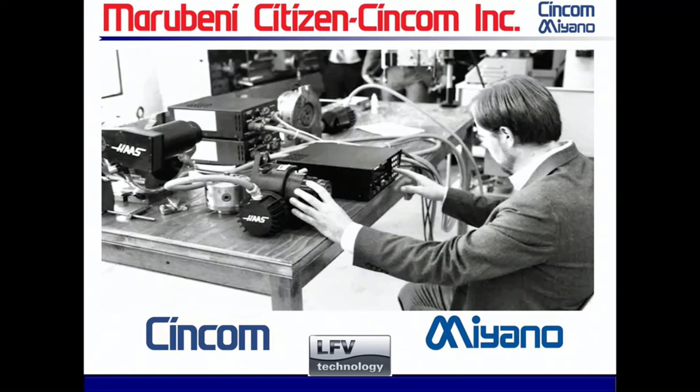Allendale Machinery is a third-generation company. We were started in 1981 by my grandfather. Prior to that, he had worked with many different machine builders and distributors throughout the country from the early 50s. After serving in World War II, he went to Georgetown on the GI Bill and then started working in the 50s and brought in a lot of the machines you see today. We now have our third generation. My father and my uncle, Marty and Andy, are the ones running the company and pushing it forward even farther.

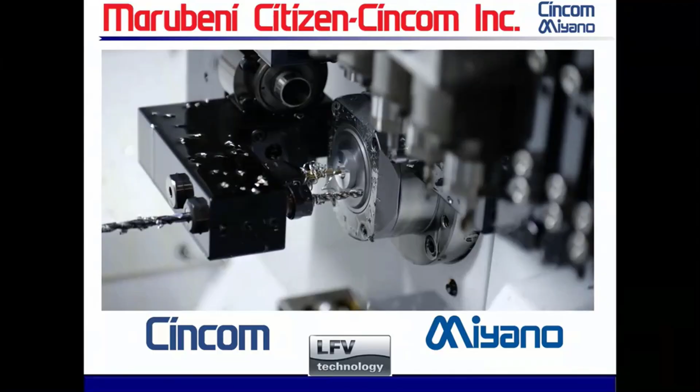With that, we've slowly grown and taken on many different lines and products. We've gone from just being a machine tool distributor to being a full service company, offering our customers tooling, service, applications, training, and really just helping them find the manufacturing solutions they need to grow. Allendale as a company is looking to help our customers compete globally in the manufacturing market space. We're really trying to be the ones that support manufacturing in the United States. We're doing this by offering our customers manufacturing solutions that are going to allow them to be efficient and be competitive in that global market.

Helping customers pick the right equipment, helping them maximize that equipment by giving them proper training, by having our engineers work with their people to optimize any programs or any tooling they're working with. And then in the end, keep the solutions up and running with service, being there ready with parts and the expertise needed to keep them making parts, making sure that all is up to the standards that we've set for ourselves. Our hope is that when they work with Allendale, they come to realize that we can offer some great solutions for them, and from there move forward and work with them on other projects.

This machine is a Citizen-Cincom L20, primarily used to make long and slender components, mill-turn, but you can also do short components as well. Really thrives in a production type environment, high volume, short cycle time, multiple shifts a day, holding tight tolerances. This machine is typically seen in the medical field, aerospace, defense, a little bit of industrial as well. Really covers a broad span, more geared towards high volume environments where part tolerances are critical.

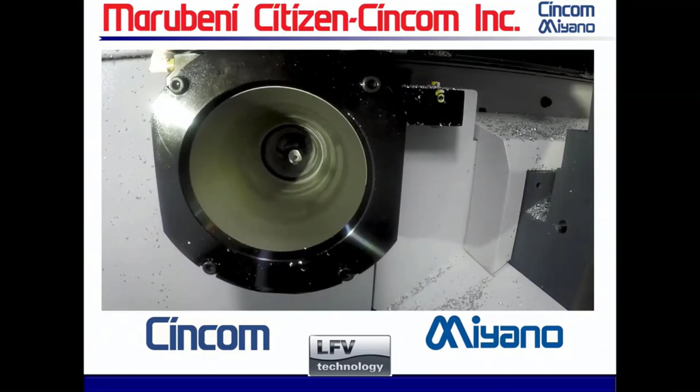So the part that I'm running right now is a bone screw, heavy medical application. It's a long and slender part. We're running it in aluminum for this demonstration so we can run with the coolant off so you can really see what's going on. Once you turn that flood coolant on, it just becomes a monsoon in there. You really can't see anything moving around.

Typically, bone screws come in a variety of materials ranging from titanium to cobalt chrome. All of those materials really need the coolant on. So for this demo, we were doing aluminum. Key features on this particular setup, the primary one is the thread whirler. It allows us to cut long thread in one pass.

This is important for a Swiss type machine because you shouldn't be drawing back into the guide bushing. You can only cut roughly 3/4 of an inch at a time. The thread whirler allows you to cut up to the maximum stroke of the machine in one pass. Multiple inserts spread out the load over the course of the threading operation.

Another accessory in this machine will be our spindle speeder. It amplifies the speed of the machine. In this case, I'm running 6,000 RPM on the machine motor, but the spindle is outputting 24,000 RPM at the tool. On the main spindle side, we're using turning, milling, and thread whirling. On the sub-spindle side, we're using turning and milling as well, but the milling being the spindle speeder, so we're actually achieving a very high spindle RPM.

We also have a part ejector that allows us to spit the part out at the end of the cycle and repeat to the next one without stopping. To optimize the process in this particular application, I was able to speed up some of the backside work. Reason that's really beneficial on this machine is you're working both sides at the same time. So any second that it's idling on the backside is just free time that you can gain. So I was able to bring more work to the backside to balance the cycle time out and actually decrease it as a whole, part to part.

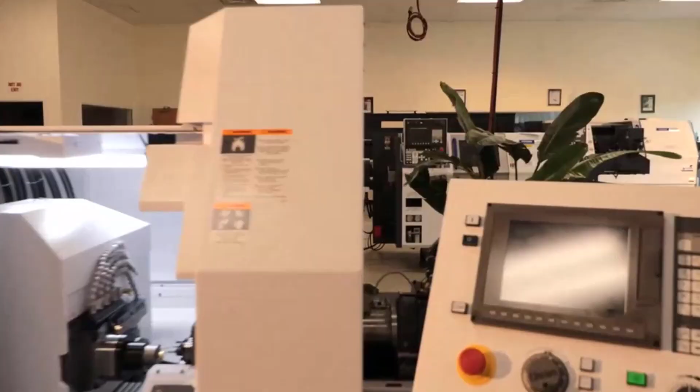We'll start off, we'll just have a look behind the control at the main spindle. On the main spindle side, we have the spindle. The spindle has a Z-axis. The Z-axis will move back and forth, control lengths on the part. The stroke on this L20 machine is approximately 200mm. So we've 200mm of travel. If we want to machine longer than that, we'd basically do a rechuck. We'd grab with the sub spindle, then grab more material.

The main spindle itself is a 10,000 RPM spindle. That spindle has a full C-axis. Also, the main spindle is actually oil cooled. So with the aid of the oil chiller, the oil cooler, it's very stable as far as machining with that spindle. Obviously, any movement on an axis creates heat. This minimizes any heat that's affecting the machining area.

We can also convert this machine from a guide bushing machine to a non-guide bushing machine. Attached to the main spindle, we can see a belt. To change over to non-guide bushing, we basically detach the belt, swing the belt to the side. The belt is actually driving a shaft that's driving the guide bushing. So we remove the belt, then we will remove the guide bushing housing itself, and we'll replace the spindle cap nut with a different cap nut to allow us to extend the spindle to move forward, basically through the area where the guide bushing is at this point in time.

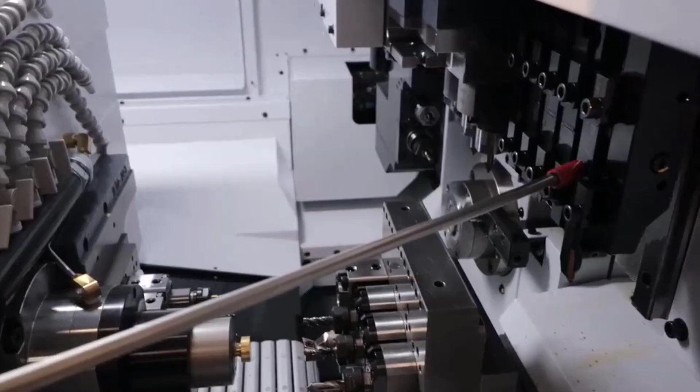Now we'll move across to the main cutting area on the machine. In the main cutting area, above the guide bushing, we have a gang plate with an X and a Y axis. On the right side of that gang plate, we have 5 turning positions. First position is 5/8. The other 4 are 1/2 inch for 1/2 inch shank tools. Also located where you can see this cutoff tool is a small stylus. That stylus basically is a cutoff breakage detector that is standard with the machine.

Just to the left of those gang tools, we have 2 live spindles in the cross location. These spindles are 9,000 RPM spindles. If needed, we can remove these spindles and put speeder units up to 4 times in those positions.

We'll move further over, we can see this set of tools. There's 2 tools there. That is actually a B-axis. The rotation on that B-axis is 0 to 96 degrees. So 0 basically would be if we were using a live tool on the face of the part. We can swing it from that location to any location and machine with the B-axis around through 96 degrees.

On the particular holder you see on the B-axis, the top position is basically a built-in spindle. The lower position accepts tools from the ATC. The ATC is actually the 12-station carousel you can see at the far side of the machine. The RPMs on the B-axis are 12,000 RPM. The tool change time for the tool in the lower position to exchange a tool with the ATC is approximately 4 seconds.

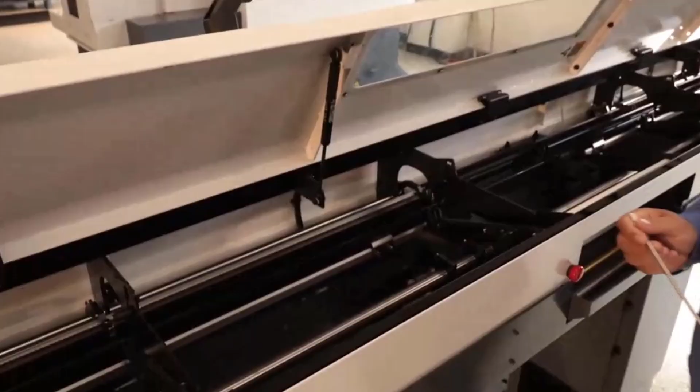The carb bar loader was specifically designed for our Cincom line of machines. Once the bar loader is attached to the machine tool, it is fully controlled from the control on the machine. Not only that, the pusher on the bar feed becomes an axis on the machine, an A7 axis. So basically that A7 axis, as the part is being machined, will follow the motion of the Z1 axis on the main spindle.

So inside this bar feed, we have a rail. This rail on this machine is approximately 12 feet long. We can put up to 12 20mm diameter bars in this rail system. So when a bar is loaded, basically it lifts the pusher out of the way. A lot of bar feed systems have 12 foot for the bar, then they have an additional 3 or 4 foot for the pusher. On this machine, when it loads a bar, it swings the pusher out of the way. So we don't have a bar feed that's 12 foot plus 3 or 4 foot. It's very compact in design.

So the pusher swings out of the way, the bar falls into the channel, the pusher comes back down, the gripper grips the bar, we push the collet on the back of the bar. So the material is supported by the channel set. The carb machine comes with 2 channels as standard. So you buy the carb, 2 channels are standard. We do have different sizes. If you want extremely small stock, you might go with a different channel size. So the bar is supported by the channel set.

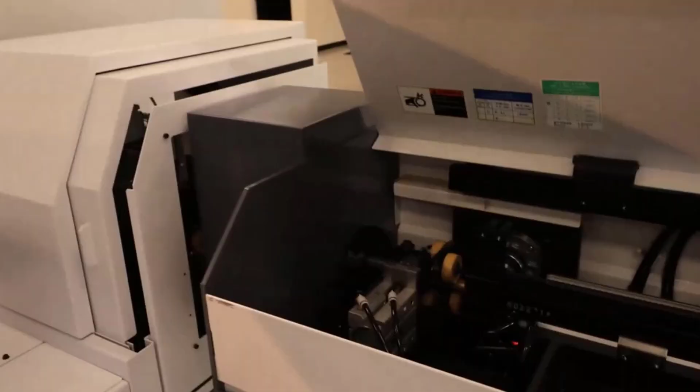In addition, there's oil that's pumped into the channel as the bar spins. The oil clings onto the bar stock and creates a hydrostatic effect that further stabilizes the bar and dampens vibration. In addition to the channel set and the oil dampening the bar, if we move down on the inside of the bar feed, on the front end, we have a set of rollers. So additionally, the bar is supported by the rollers inside the bar feed. As the pusher moves forward and the bar stock gets shorter, once it comes to the pusher, these grippers will open and allow the pusher to pass through.

Additionally, on the back of the main spindle, I just opened the cover, we have a further set of rollers on the back of the spindle. Like I said, the bar feed is fully integrated with the machine. So when we open the collet to grab more bar stock, the machine actually opens these rollers also. So you're not dragging the rollers across the bar stock.

So now I'd like to hand you over to my colleague Ray Navarro, who will go over a part being machined.

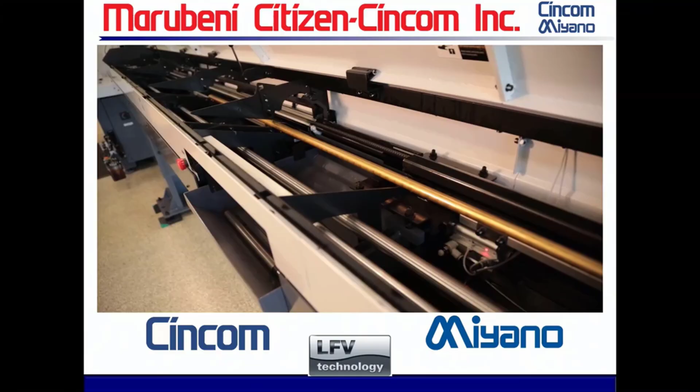Now we notice it's time for bar change. The machine has received the end of the bar signal, and the carb will execute a series of operations and load a new bar. The carb is fully controlled and synchronized with our M70 control. The carb is the best way to go on our Cincom lathes.

With this, we have concluded the ATC demo part.

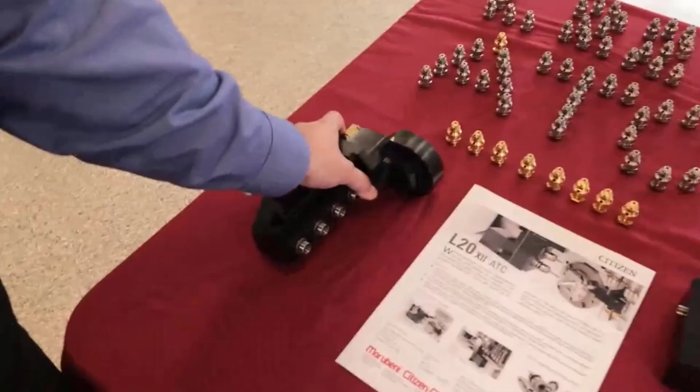So the ATC machine is really a state-of-the-art machine. It's really a standard type 12. This is the holder you can see for the standard type 12 machine. If we get the option for the ATC, this will be the holders, right? MEU 110. These are the holders that we call BT15 that go into station 12.

These are our parts I want to show. So it's a unique machine for very complex parts that we can get done. Talking about the footprint, this machine, like I say, is standard to the type 12. The only thing I will point out is it has 472 millimeters in the back side of the machine that holds the whole mechanisms of the carousel and the slide.

So now I want to talk a little bit about M70 control. M70 control is a unique system that realizes fast and smooth operations. It displays easily understood illustrations, equipped with high-speed NC, on-machine check function, code list display, and much more.

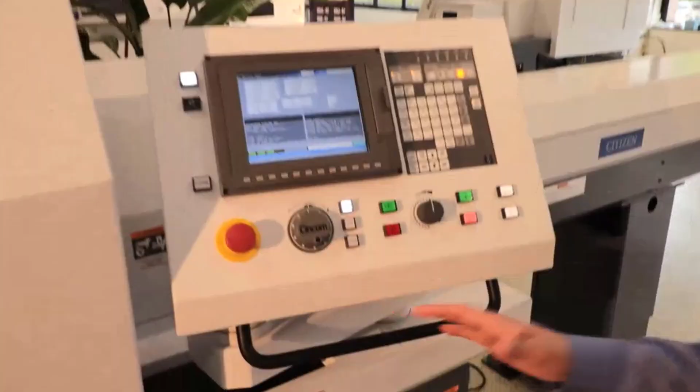So now I'm going to start going through MC data. MC data, or machining data, is utilized by the machine to gain information for the current job that is running. Into the MC data, you can set bar stock. As you can see, it's highlighted in yellow. Tool position point, cutoff tool number, cutoff speed, cutoff feed, cutoff end diameter, and there's some others. Like this one, you can also swap guide bushing less.

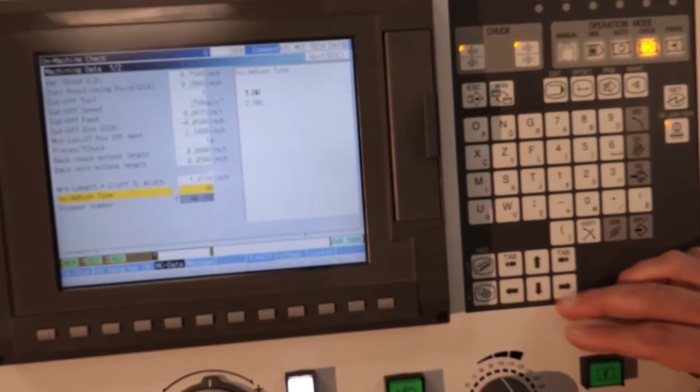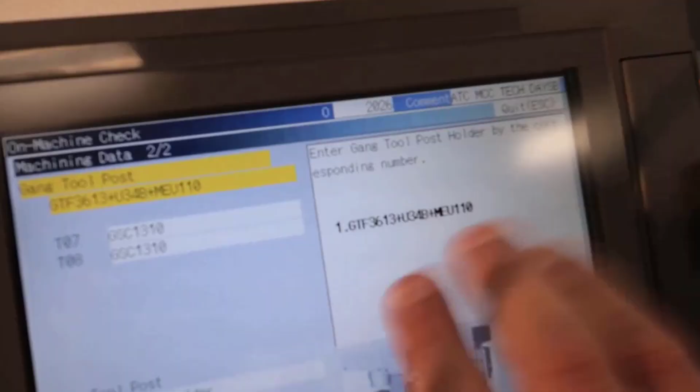Second page of MC data, this is how the machine recognizes which holders are being used for the job that you want to run. So as you can see in the MC data, right now you see MEU 110. This is so user friendly. So you can see here, every holder is identified with the number that we call MEU 110 in this case. All the rest of the holders have their own name.

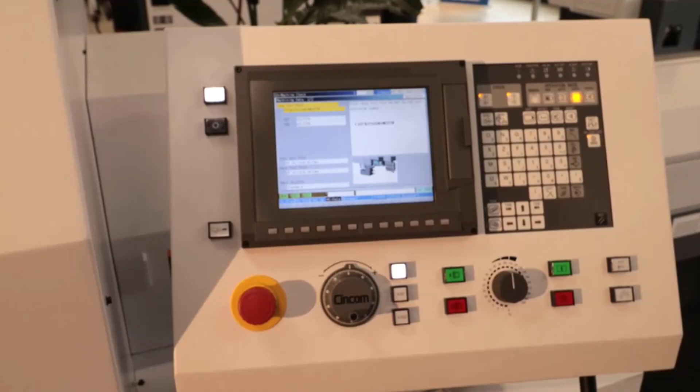So now I want to show, you can see inside the machine. Right now, this is not how we start running anything, right? But I want to show the A5, which is the axis that comes forward and retracts. A6 is the rotational axis that holds all our tools on the carousel.

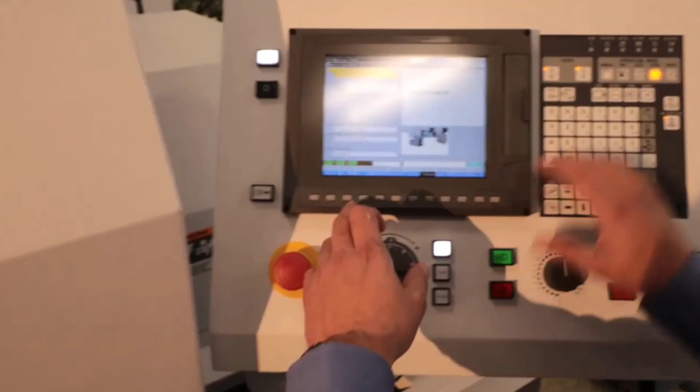And this machine and the beauty of Citizen, they have been developed specifically for ATC. They have a specific HMI screen, which I'm going to show you right now. ATC. So this is the screen that we mainly use for setting up tools. You can manipulate anything from here regarding the ATC, such as tool change, tool store, take the tool, index the magazine, shutter open, shutter close, air blow, magazine retract, and back spindle retract.

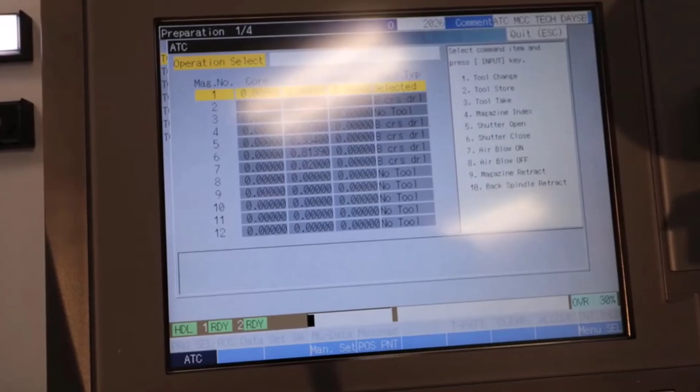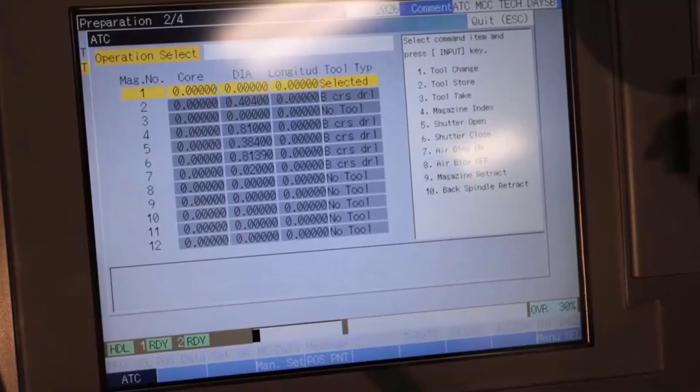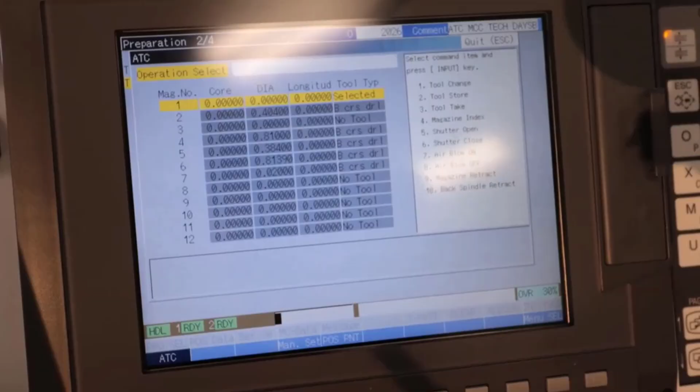So in this page, if you have the pocket empty, you will place the holder with your tool, and then as soon as you set tool 12, like we normally do — people that know Cincoms know, but for those who don't — you will use that diameter, then touch off your bar stock. Then if you had, let's say, number one highlighted in yellow, you will store that tool, and the magazine is so smart that it always remembers where the tool is located.

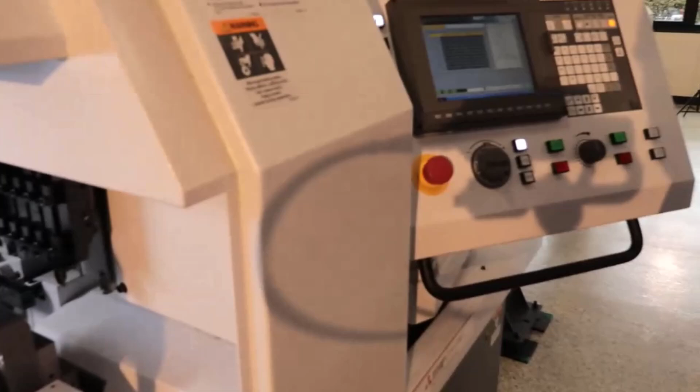So I'm gonna try to show right now. If you see in the machine, we have the A5 kind of toward the front. So from this page, I'm gonna say magazine retract. Magazine will go all the way to the back, zero position. I want to close my shutter, so 6, close. Now I'm gonna do a position point. I want to show one of our greatest fixtures. Cut off. I'm gonna cut off.

This is a great machine.

So right now, I'm gonna show the handle and check function. I'm gonna track this. So if you see here, now I just hit cycle start. I have my machine. I'm gonna hand wheel. The great advantage of hand wheel: you can move forward through your program, and if you decide to stop, it will stop. Also realize that in the check mode, you can stop your machine, do any edit you desire on the fly, and go back and keep going.

This is how Citizen... All right. As you see, the machine is moving. I'm going to show this. Start my facing. So let's say right there, I want to stop my machine, so I can just hit one block. After that, I can say correct. Oops, I'm going too fast. So as you see, now it allows me to make any edit if I want, then continue. So the only thing you have to do is just hit operate, and then you can keep going.

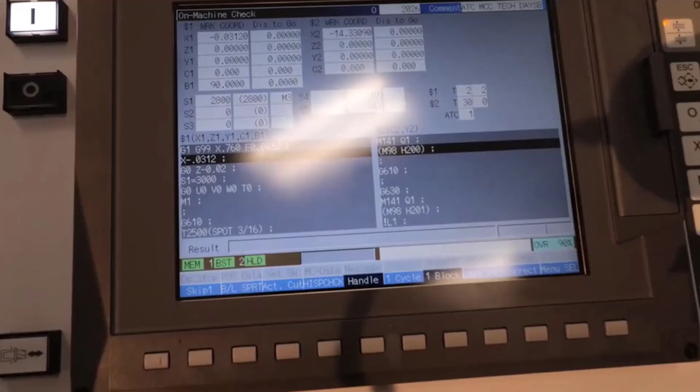So let's keep going. So I'm gonna stop right there. Now I'm gonna reset the machine. This is just showing one of, to me, the greatest features; when you're setting up the machine, this will be awesome. I'm gonna restart. So now, going back to the ATC page, I want to show you how you can perform a manual tool change.

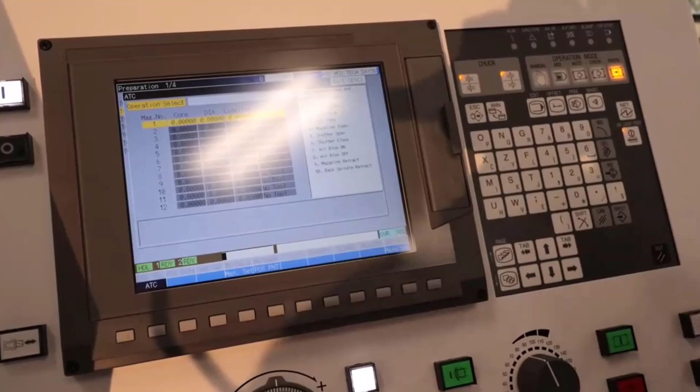So, ATC. Right now, as you see here, we got tool number 1 selected. So let's say I want to store that tool. You see here, we got 10 options. Number 2 will be tool store. So the only thing I have to press is input and cycle start. I would usually recommend bringing the stock inside the guide bushing just for safety. So I will do that right now. Okay, so I'm good to go.

ATC, I hit tool 2, store. Going slow with feed hold slow, just so everybody can see, placing the tool on station 1, going out. Now I have tool 1 holder empty. Let's say now I want to grab tool 6. If you can see here, the only thing I have to do is just highlight station 6 and say tool take, input, cycle start, inside.

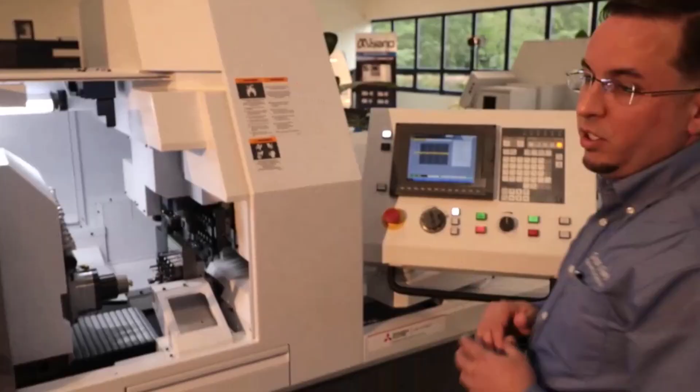It's going to tool 6. You see the magazine index to 6. Grab the tool, going out, and done. So I just want to show this. Probably people will be wondering about how we set the tools. It's really simple to set tools here and run this machine. Use the same code as a standard machine.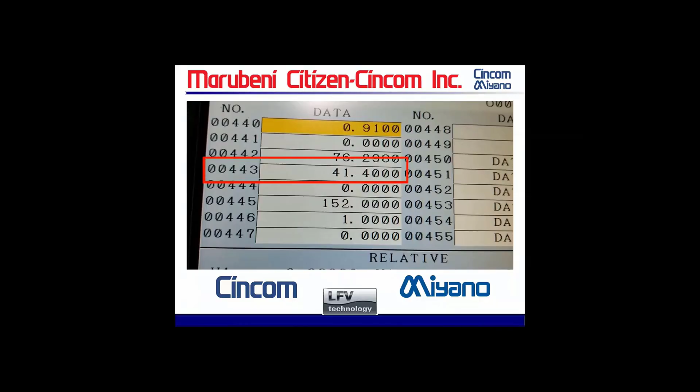And here's an example of almost real-time info sent from the bar loader to the machine. As I move the pusher by hand, see custom macro 443. Now with this type of information being sent through the program, if the operator or the setup person forgets to send the bar loader info, the information will be sent by program. We are also working on having this information of parts remaining and pusher positioning showing up on our operator screen.

Another new feature that we'd like to add to our bar loaders is last bar sensor. So if the lid is closed and the machine is in automatic and the last bar is loaded into the channel, now with the lid still being closed, we have a warning light blinking that states that there are no more bars left in the bar loader.

Please be on the lookout for this option and Ethernet connection between the C320 and the A320 in the near future. Thank you for your time, and please continue on watching the MCC Tech Days.

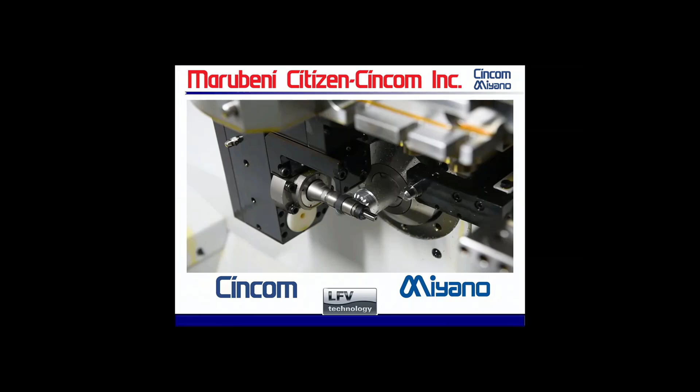Thank you for joining us today. I hope you got a small glimpse into what the Citizen-Cincom Swiss CNC machines are capable of.

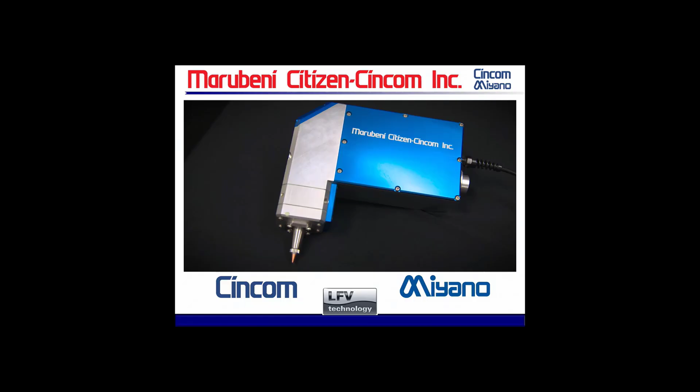The L2000 utilizes the IPG Photonics fiber laser systems. IPG is the world leader in providing fiber optic lasers and is fully supported in the US. Multiple power units are available that address specific application requirements. One option is a QCW, quasi-continuous wave 300-watt system that can provide power bursts to 3 kilowatts for extra power when needed. The laser head assembly mounts on the gang tool slide of the Cincom machine.

The movements are programmed in the part program of the machine control. The unit has the unique capability of also mounting on the B-axis tool position, allowing for laser cutting at various angles for components that require angular laser cut features. The laser head assembly is liquid tight, so it's capable of operating while high-pressure coolant is flooding the workpiece during the machining process. Internal air pressure protects the lens and internal components.

High-pressure coolant that is used during the cutting process also feeds coolant through the tubing material in the auto-loading bar feed system. This provides a flushing of dross or chips that are created during the laser cutting process. An integrated custom-designed CCD camera for optical viewing and alignment is included for XY beam alignment to the nozzle. The live camera view is visible on the included touch monitor. This greatly reduces setup time.

The L2000 is completely interfaced to the Cincom control. Cutting path, offsets, laser cutting parameters, laser focal point, and gas pressure are fully controlled and edited in the machine control. One of the unique features of the L2000 is that it's a modular system and not designed for a specific model Cincom or Miyano machine. The system can also be retrofitted to some older model Cincom machines.

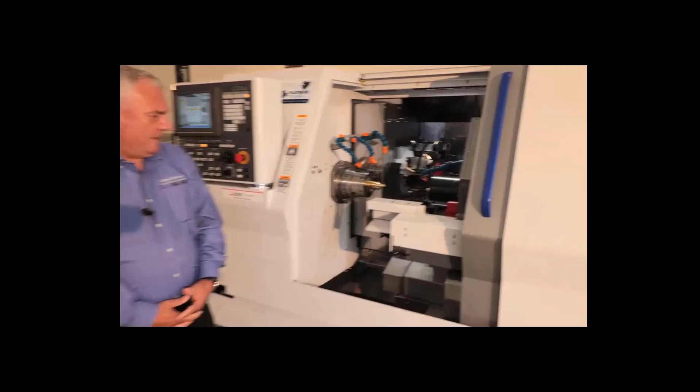Hello, my name is Tim Duffy, and welcome to the review of the Miyano BNX 51 MSY machine. The BNX 51 MSY machine is a twin spindle single turret machine. The machine has a total of 7 cutting axes. What makes this machine unique is the subspindle has not only a Z-axis, it has an X-axis that allows us to have a lot of flexibility in machining the front work and the back work simultaneously. We'll see that later on when I run the test part.

The machine is constructed on a one-piece casting. That casting is a platform design. That platform design helps us maintain flat surfaces and reduce distortion. So it's a very stable and extremely rigid setup for the foundation of the machine. Slides on this machine are box ways and hand scraped. On the left side, we have the main spindle. The main spindle is a 5,000 RPM spindle and 20 horsepower.

That spindle is supported by 3 sets of bearings at the front. The 3 sets of bearings comprise 2 sets of cylindrical roller bearings and 1 set of angular contact ball bearings. The roller bearings absorb lateral loads, whereas the angular ball bearing accepts axial loads. At the rear of the spindle, we have 2 bearings that are cylindrical roller bearing design. So having the 2 on the back really stabilizes the spindle.

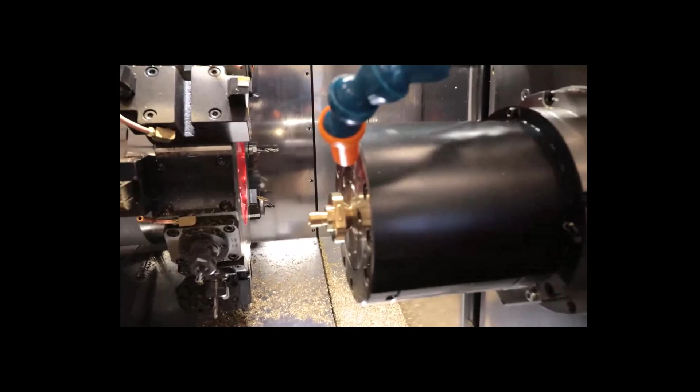Located on the right side of the machine, we have the sub spindle. The sub spindle is a 10,000 RPM spindle. Sorry, 5,000 RPM spindle, 10 horsepower. The spindle bearing layout is the same as the main end, the 5 sets of bearings. The nose on the sub spindle is 110 millimeters flat. And it's also standard with a Hardinge S22 pad system. That sub spindle also incorporates a C-axis along with a brake, just like the main spindle.

As I mentioned earlier, the sub spindle has a Z-axis and an X-axis, the X2 axis. So having that X2 allows us to machine the part on the main spindle utilizing the X1 and Z1 of the turret. On the back end, you can see a double turning block. So independent of that, on the back end, we can be utilizing the X2 and Z2 and machining a totally different part profile on the sub spindle.

Above the spindle, we have another coolant line for cooling the part on the subspindle side. We've also got an air port on the subspindle side. Within the subspindle, we have a pneumatic ejection unit. With that ejection unit, we can program an air blast to clean chips out of the collet. We can program the medium pressure coolant system to flush chips out of the collet.

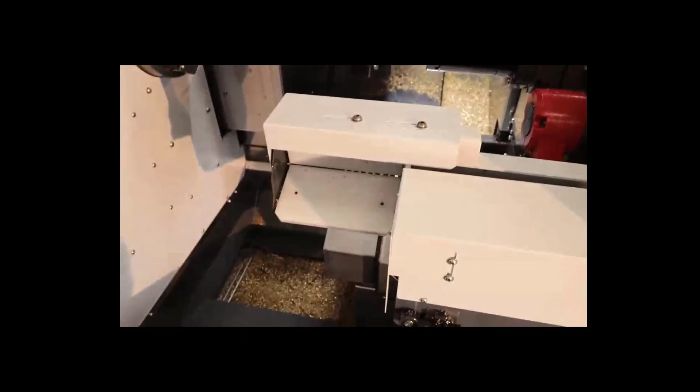So the part is ejected into the parts catcher that's attached to the subspindle. It would swing up, catch the part, and the ejection unit will move forward and knock the part out. That parts catcher can come forward and catch a part off the main spindle if there's no desire to do any back work; we can just machine on the front and cut off. If you have a short bar loader where the remnant might be pushed out the front of the machine, we can utilize this basket to come up and catch the remnant at the end of bar.

The machine also comes with a work conveyor. It's standard. The parts catcher drops the parts into the work conveyor, which transfers them out the right side of the machine. We also have a chip conveyor as standard, a hinge belt chip conveyor.

If we have long parts longer than 150 millimeters, we can feed those long parts, maybe shafts, through the subspindle with the use of a long shaft work device. That device can handle parts up to a 36 millimeter diameter.

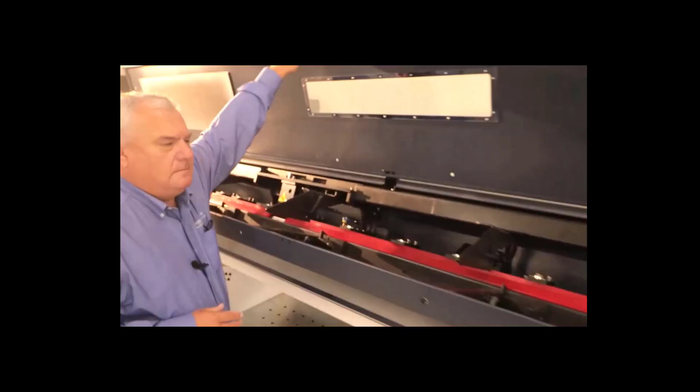I'd like to move over to the bar loader. The bar loader is a Cav 51 MF bar loader. We'll take a look inside. The rack system is approximately 12 inches wide. So this being a 2-inch diameter machine, we could get 6 2-inch bars in this rack system. Now, just like the bar feeds on our other Swiss style lathes, this bar feed is fully controlled from the control on the CNC.

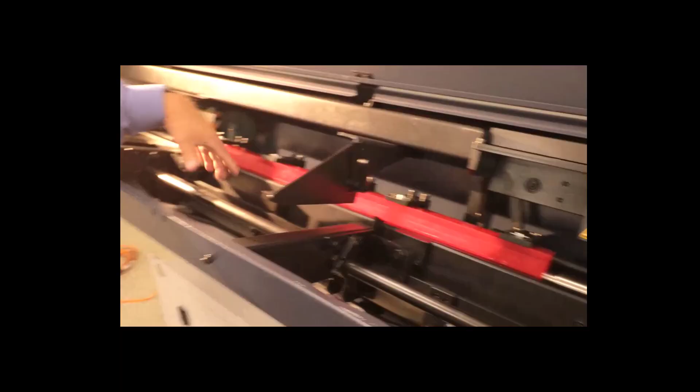So the bars are loaded into the channel. The channel swings out of the way. Once again, the pusher is an integral part of the bar feed. This is a 12-foot loader. There's no additional area for the bar pusher to go. Basically, when we open the channel, it removes or extracts the pusher. So the pusher moves out of the way, drops the bar in. The bar is pre-fed to the gripper system. The pusher is inserted on the back end of the bar and moved forward.

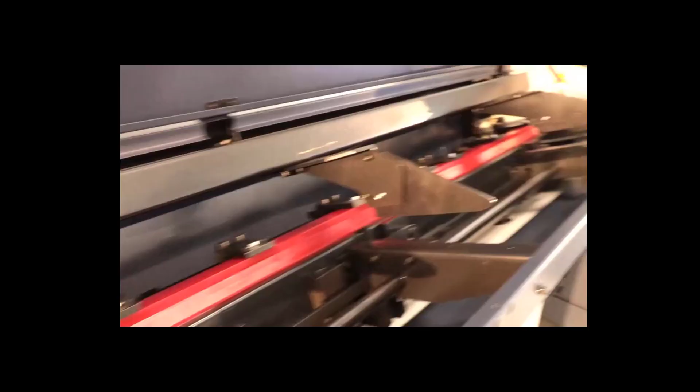So the bar is supported by the channel set. In addition, oil is pumped into that channel and is used to stabilize the bar. So as the bar spins, the oil clings to the bar stock, creates a hydrodynamic effect to stabilize the bar. In addition to the channel set, at the front end of the bar loader, we have an anti-vibration device, which is basically sets of bushing blocks specific to the size material that you're using. As I mentioned earlier, the bar feed is fully controlled from the CNC.

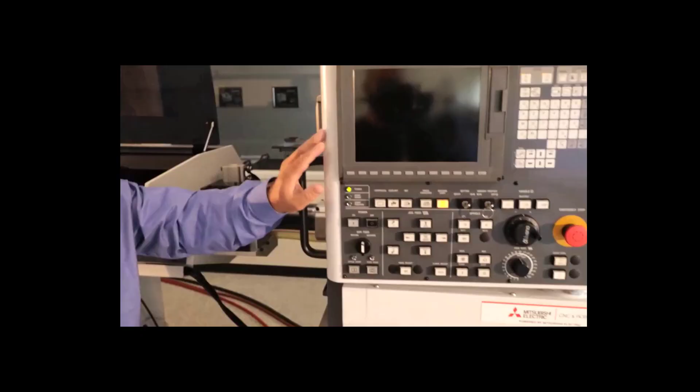That concludes the overview of the layout of the BNX 51 MSY machine. Let's take a look at a part being run on this machine. We start off using a double turning holder to rough the front side and the back side with 80-degree tools. The part on the right side in the sub spindle has previously been machined in the last cycle. We're using brass in the machine for demonstration purposes, but the speeds and feeds used are for stainless steel.

The next operation, we finish turn the front side and finish turn the back side, again utilizing this double turning holder. The next operation, we come in, we groove the front side, groove the back side, a relief for threading. Then we thread the front side and the back side, 2 different pitches. We are using the simultaneous threading option. We come in, we clean the back of the grooves and the threads. We come in, we spot drill the front and the back. We drill the front and the back.

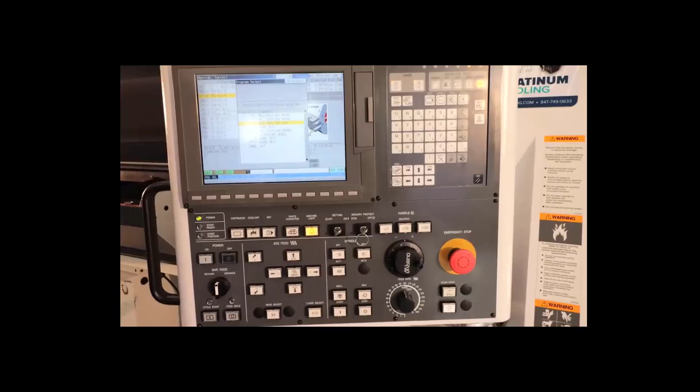Let's take a look at some of the features on the control. The control is a Mitsubishi M70 control. It's a control we have on quite a few of our machines. If you watched the demonstration earlier on the L20, that machine has basically got the same control. So here we start off on the preparation screen, the first screen that comes up when we power up the machine.

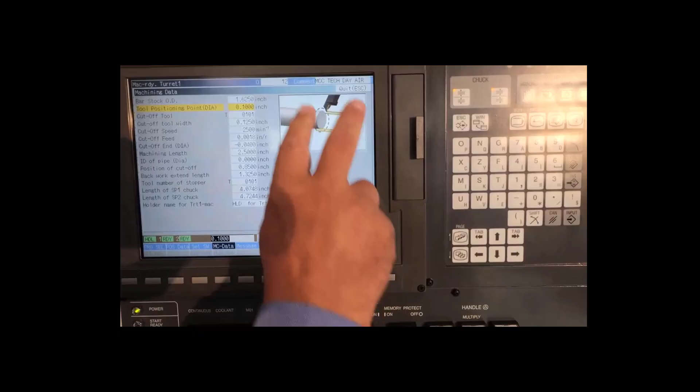It comes up, and that's just what program we want to run. Just hit enter. So when I hit enter, it comes up with the machining data page. Those of you who are familiar with our Swiss style machines will recognize this page. So within this page, it asks us what the stock diameter is, what clearance point we want above the bar stock for automatic cutoff. So as I go through, it's showing us graphically, it's identifying each individual section with a graphic.

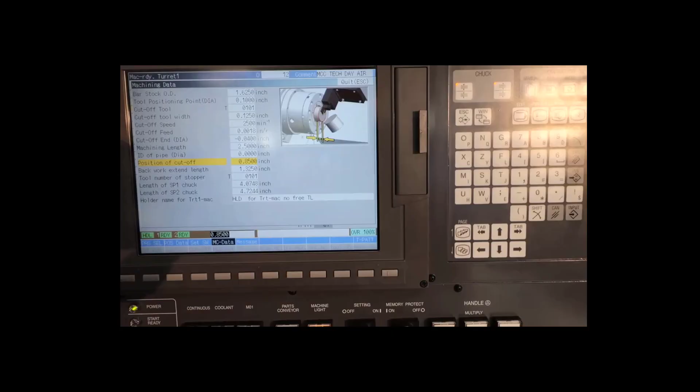So we've got the cutoff tool number, cutoff tool width, cutoff speed, cutoff feed, cutoff end. Basically for automatic cutoff, we can have different speeds and feeds within the program. One of those items is machining length. If we're in tube stock, the position of the cutoff, what clearance do we want for the cutoff between the tool holder and the main spindle.

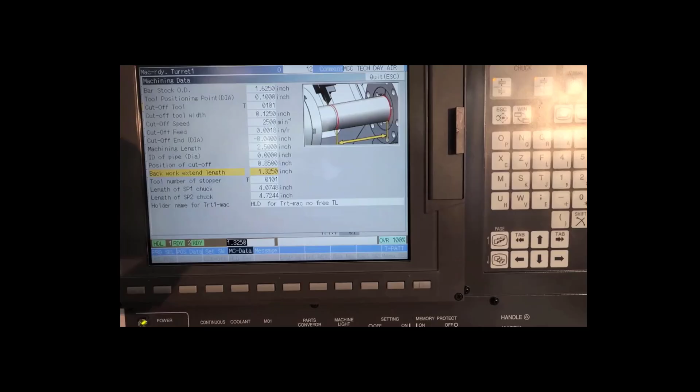The backwork length, how far do we want the part sticking out of the sub spindle when we chop the part off. So when we pick the part off, we call up a special code, and the machine automatically figures out where it needs to be to pick off the part. It knows that because of the machining length and the backwork extended length. How far do you want the part sticking out? If we're using the stopper, we would tell it what number the stopper is.

It's asking us the length of the spindle 1 chuck and the length of the spindle 2 chuck. Depending on what you put on the machine, you might put a 6-inch 3-jaw chuck on the main spindle. If you did, this number would change. If you put a 5-inch chuck on the sub spindle, that number would change. So what we put in here obviously would affect how far the machine goes to pick the part off. But the machine's looking out for you basically once you give it this information.

And the last one is tool holder name. I'm going to go into the tool set page next, but that selection there allows me to choose a free tool layout or free tool. It might be a tool holder that you designed yourself that you can call up the geometry. So I'm just going to move on basically to what I would call the tool set page. So the tool set page obviously lists the 12 stations on the turret.

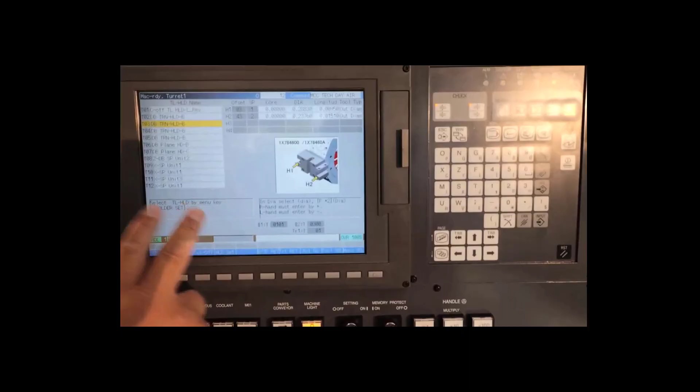Each one of those stations has got a different tool block in. So on this machine, I don't just call up a tool, I actually define what tool block is in that particular tool station. You can see in position number 1, I have a cutoff tool. Now if you're setting up a job, you'd basically want to set the holder for station 1. So I hit holder set, then I've got choices on the right hand side.

As I go through the tool files, you can see it's calling up different tools. So if I cursor down, we look at a few more. So here's a tool, for instance, our tool holder. It's got 2 pockets on the front side for sleeves. It's got 1 on the back for a turning holder.

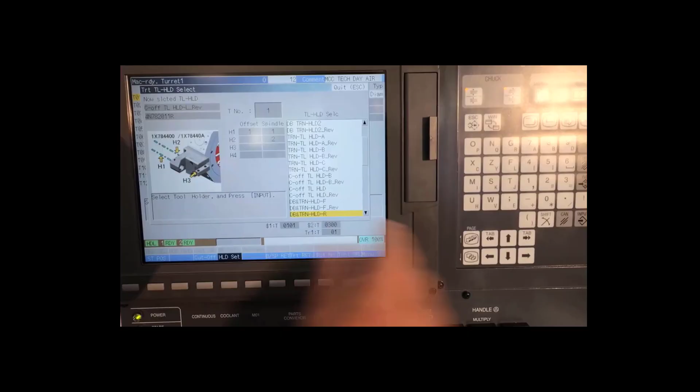So if I want to set that holder, I would just hit input. So the machine's asking me, do I really want to set that holder in station 1? I'm going to say yes. So once I do that, it gives me choices. It's asking what offsets I would like to designate to each one of these 3 positions. You know, maybe you're not using all 3, and you don't have to obviously put 3 different offsets in.

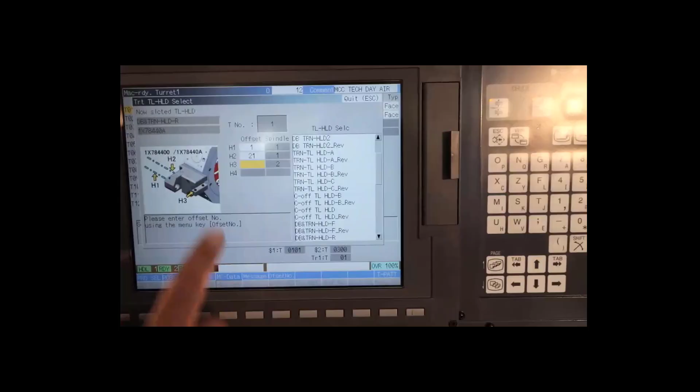But H1 is the outer position on the front side. So this is tool 1. So I might just say, right, okay, H1 or pocket number 1, I'm going to use offset 1. Pocket number 2, I might say I'm using offset 21. I'm choosing 21 over 2 because I've got a station 2. In H3, if I was putting a turning tool in the back, I might call that offset number 31.

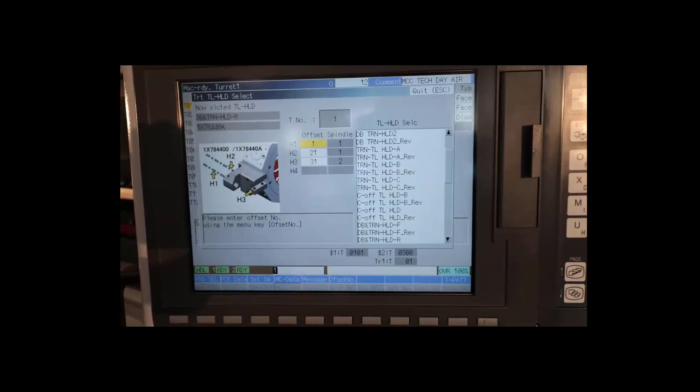I don't know if you can see on the screen, but each one of these positions, the machine already knows what spindle that pocket is used to machine on. So if I try and do something strange in the program and try and maybe drill with this position on the sub spindle, the machine's going to alarm out. It's going to say, you really can't do that.

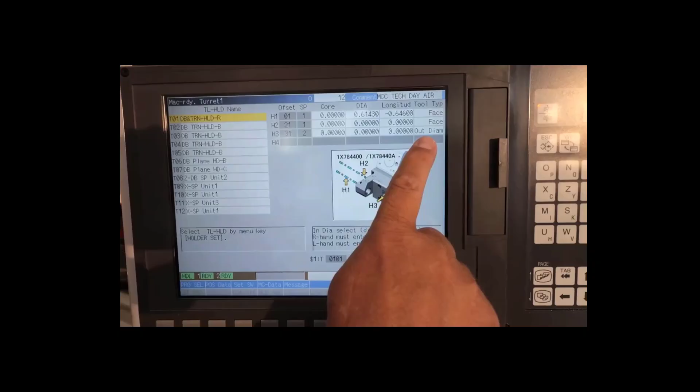Now when I call up the holder, the machine drags out data for that particular tool holder. So I've now basically set this tool in one, so if I hit escape, you can see now I've got the 3 sets of offsets. H2 and H3, they've got no values in there, but it's showing me that H1 and H2 are face tools, in other words, they're drilling type tools, and H3 on the back end is an outside diameter tool.

So when I call the holder up, the machine drags out geometry from the tooling files pertaining to each one of these positions. We have data in the diameter and the longitude at this point in time because tool 1, offset 1 on the last tool, remember, it was a cutoff holder. It's still got the old data in. So if I was physically going to set this holder up, the first thing I'd do is clear out this data.

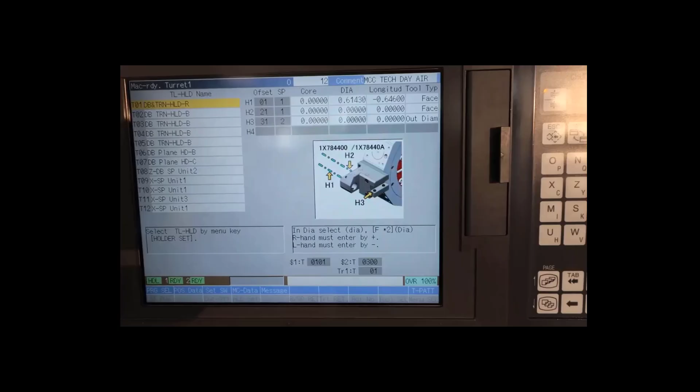So the machine knowing the geometry for this holder, that would mean if I wanted to drill in any of these 2 stations on the front side, I would just call the tool up on the offset. I wouldn't have to put any additional tool geometry in the diameter to get the tool to move on center. Obviously the longitude would change depending on the varying lengths of the drills or whatever you're using in that station. So you could go through there and set each one of these pockets with different holders.

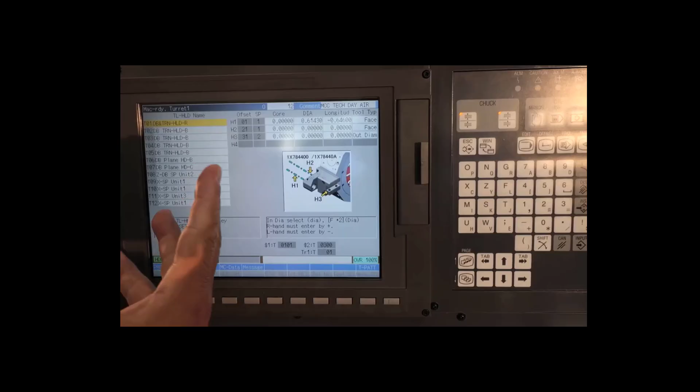Now when I output the program, it's going to take this data with me. So the next time I set the job up, if you have the tools on a cart and you put all the holders in the machine, you just call up the program, all these tools would be already set, all the geometries. So it would overwrite the geometry that was already in from the last job.

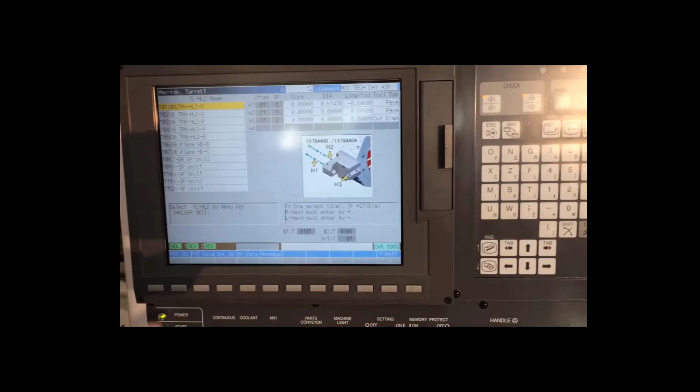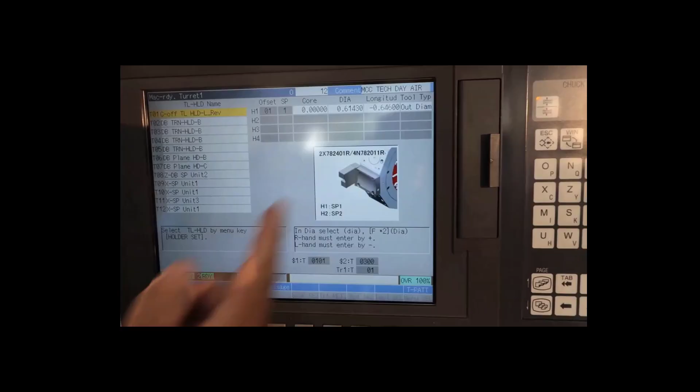I'm just going to quickly go through and I'm going to call that cutoff tool holder up again. I'll just page up. So as I say, graphically I can see what holder that I want, and it's actually that one there. I'm just going to hit input and say yes. So I was using the cutoff in there at 1. I can put another offset in there if I want to use the same tool on spindle 2. I'm not using the tool on spindle 2 with that cutoff, so I'm just going to hit escape. And once I do that, you can see that's just gone back to where it should be.

Now one of the good features too on this machine is if I want to index a tool, I can just cursor to that tool and then I can say tool select. So right now if I hit cycle start and we look in the machine, it's going to clear the axis out the way and it's going to index to that particular tool station, which is station 5.

Now I made an index to station 5 so maybe I wanted to take a look at the insert. Maybe the insert was chipped, so I wanted to inspect the insert. What I can do on the tool selection page is I can go back into tool select, and if I cursor, I've got different options to do different things. So this here is asking me, once the tool is called up, what do I want to do?

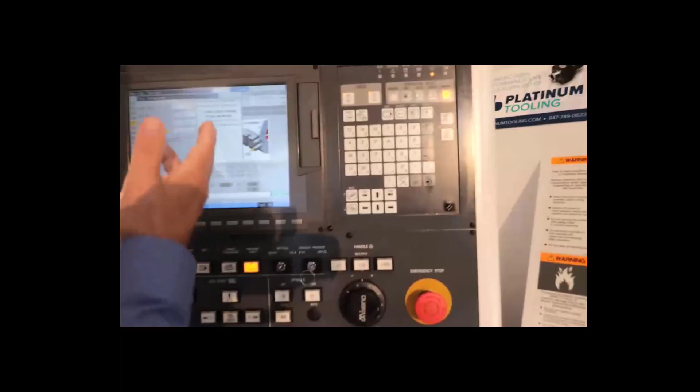So after calling up the tool, I can tell the X to move in. So I'm actually going to do that with a different tool. So I'm going to go to tool number 2, tool select, I'm going to cursor down, and I'm going to call up option number 2, which says index to station 2, but when you do that, bring the tool in. So in this type of scenario, I'd want to do that, maybe to change the insert or inspect the insert. So I'd change the insert, and then I might send that turret back home.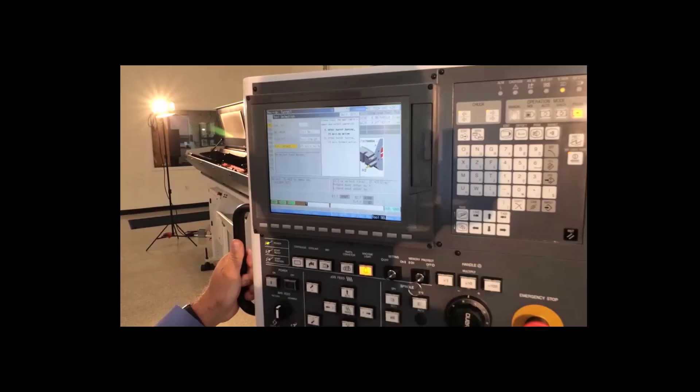So if I wanted to do that, I'd really want to go back to 1. So I could say tool select, and cursor down, it's probably still on 2, which it is. Type in 1, and hit start. So I was already at that station, it just moved back and cleared out the way.

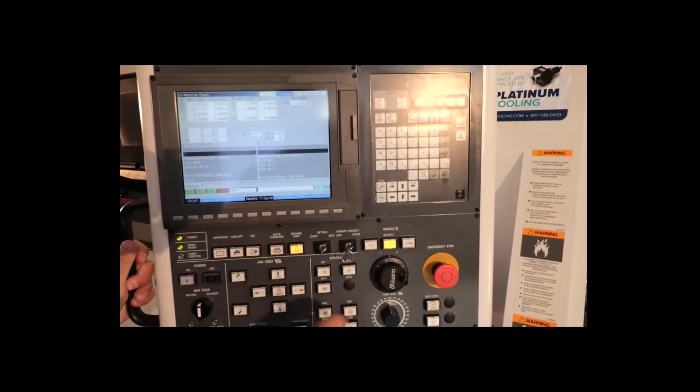One of the many features on the Mitsubishi control that we've had on our Swiss machines for a long time is the program check function. I think a lot of you from our Swiss world are familiar with it. So in program check, I can actually high speed check the program for syntax. In other words, no motion, it'll just run through the program and check. Or I can utilize turning of the handle as I run through the program.

So I'm going to go handle 1 cycle, and I'm going to hit cycle start. So once I hit cycle start, if we look into the machine, nothing's actually started moving. Nothing starts moving until I start cranking the handle. The first operation on this part is actually doing the rough turning. So obviously, with a lot going on this machine, if you were setting it up for the first time, you might want to use program check. We don't want an expensive crash.

So better that I can stop at any time. At this point in time, I'm just going to hit reset. Now obviously things are very close there. If I want to, I can just send the machine back to what's known as start position. Start position is basically with the stopper tool at the right location and the axis cleared out the way.

Now if you were watching the L20 presentation earlier, in the Q&A section, someone asked, can I start the program halfway through? The answer to that was negative on the L20. On this machine, in program check, I can search to any tool and rerun a tool. So basically to do that, I'm going to hit N search. So I'm going to search for a sequence number in the program.

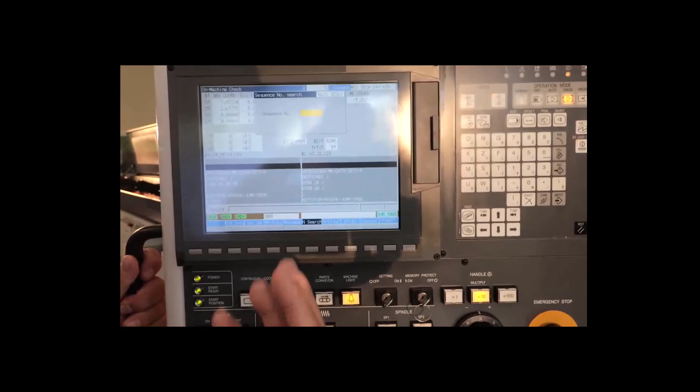You saw this test part running in the video. Obviously, there's a lot of things happening at the same time. So you certainly need to construct the program in a fashion where it's safe to be able to start the program halfway through. That's very easily done.

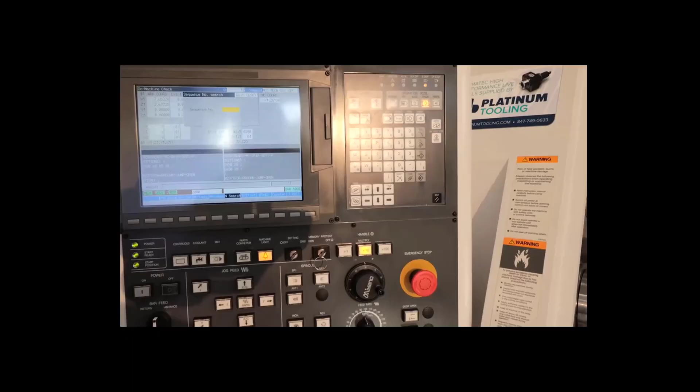It's been said before about the programming on Cincom lathes. It's the same on this machine with a Mitsubishi control. It's simple. Yeah, it's different. It's one program with 2 lines of information, and this is the case on this machine. But with a little bit of education from one of our first-class engineers, you can learn to program a multi-axis lathe pretty easily. So anyway, back to the drawing board here.

I'm going to say tool, rather sequence number 2000. So I've searched for sequence number 2000. I believe it is the finished turning tools. So now it's coming in and it's doing the finished turning on the part.

It's finished the turning, so at that point in time, as I say, you might have just changed the insert, you might have had to rerun the tool, you might make an offset, change the diameter. If the part is too large, obviously we could make the offset and rerun that tool. I say we can rerun any tool that I have on this demo part because of the way I've constructed the program.

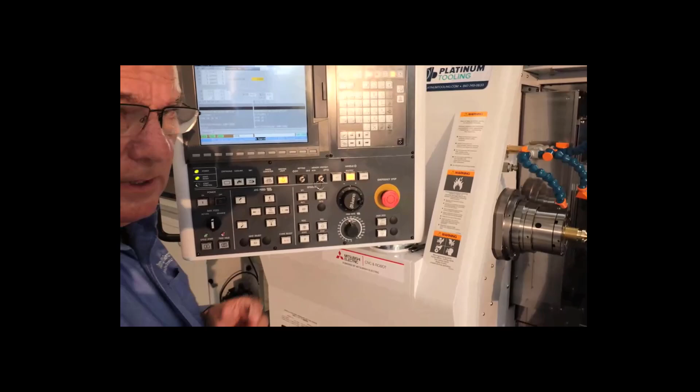If we run it through after we've changed the insert and the part is too small, we can hit this button here, and if we go back through program check, we can put the material back on. That is not true, by the way.

Anyway, it's a very nice feature on this machine, being able to search through and rerun tools. That's what most people do on typical lathe type applications.

So after the review of the control, basically what I'd like to do is just mention that, remember, the bar feed and the machine are entwined, they're plugged in. The bar feed is controlled off the CNC. So when you make that call for service, you only call up one company. You call a distributor, you call up us. We handle the bar feed, we handle the lathe.

Options for this machine: I mentioned the turret. The turret is capable of up to 1,000 PSI through the turret, so we can have high pressure up to 1,000. We have mist busters. We have our tech center in New England that can provide auto loading solutions, auto extracting solutions.

So with that being said, I believe at this point in time, that finishes the control. If you have any questions, I'm here to answer them. Okay, this is a good time to send in your questions. There's a short delay before the questions appear, so be patient with us. I have a few quick questions right off the bat, Tim.